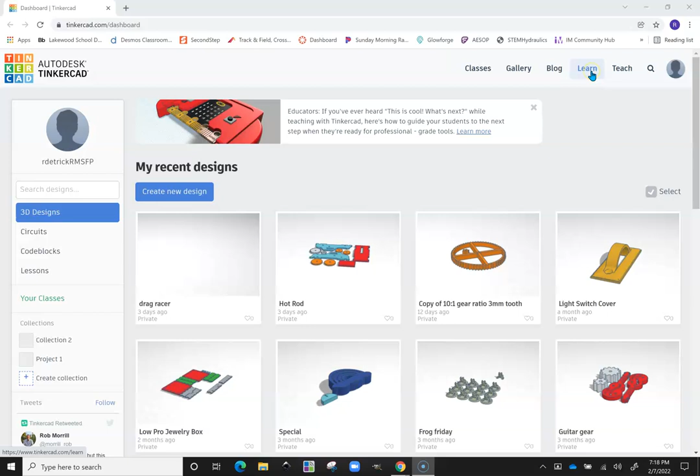Hey guys, in this video I'm going to go over the steps to correctly do the skull button. It's part of our lessons, so I'm going to click on Learn, Lessons, See All Lessons, and scroll down till I find it. There it is. I'm going to have to restart my progress, but you won't.

Okay, so here we go. I'm going to click on Start, and it will tell you step by step what you need to do. So if you wanted to, you can just follow along and do the steps, read them and do the steps, or you can follow along with me.

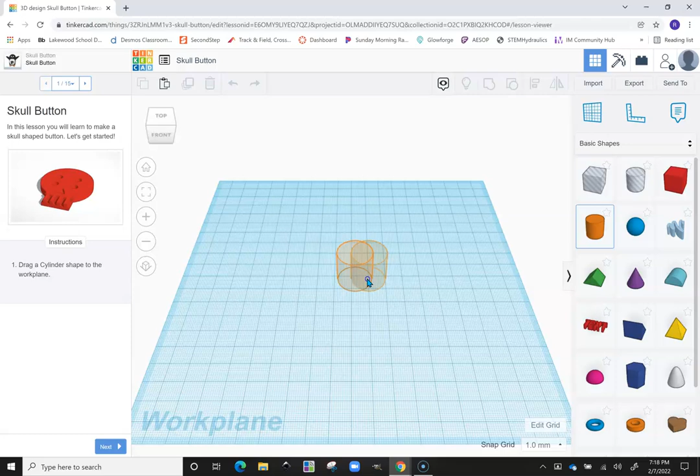Drag a cylinder shape onto the work plane. Okay, that looks pretty good. I can zoom in and make sure it gets perfect. That looks good. I like to make all of my cylinders nice and smooth, so I'm going to increase the number of sides while I'm here. Made it nice and smooth.

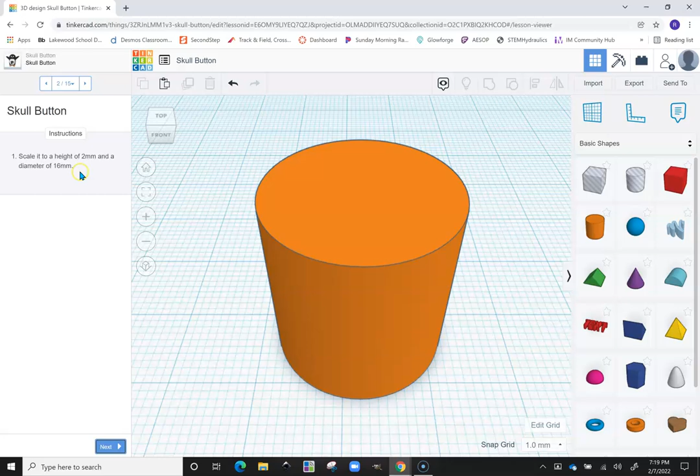Next, scale it to a height of 2 millimeters and a diameter of 16. I'm going to scroll out a little bit and click on the handle for the top. It needs to be 2 millimeters, and the diameter needs to be 16, so I need to change both of these to 16 and 16.

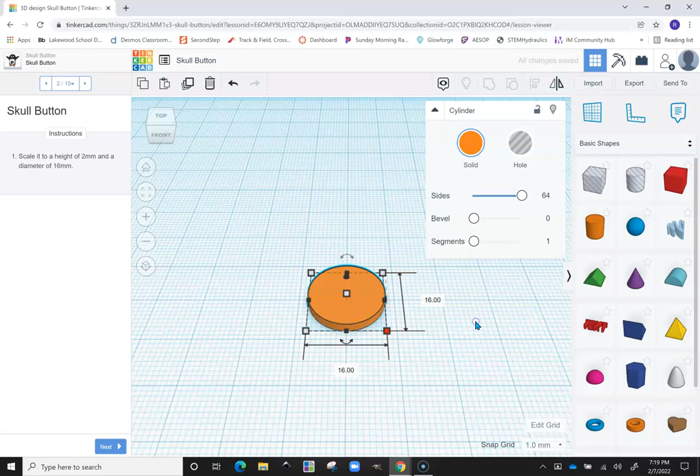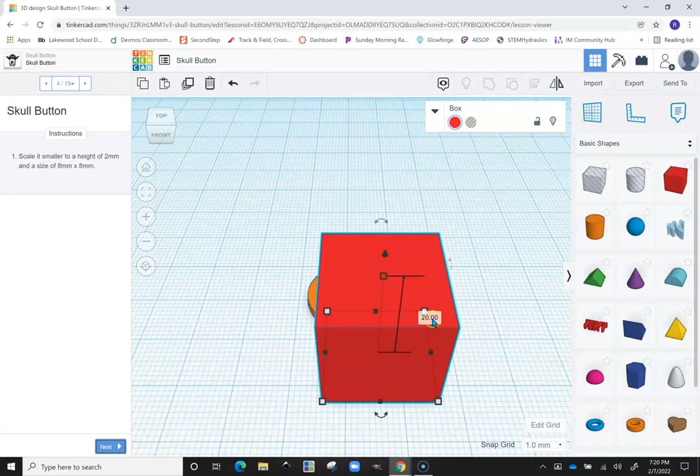Next, drag a box to the work plane. There's the box. Next, scale it smaller to a height of 2 millimeters and a size of 8 millimeters by 8 millimeters. So a height of 2 and a size of 8 by 8. I already put it in line where I think it needs to be.

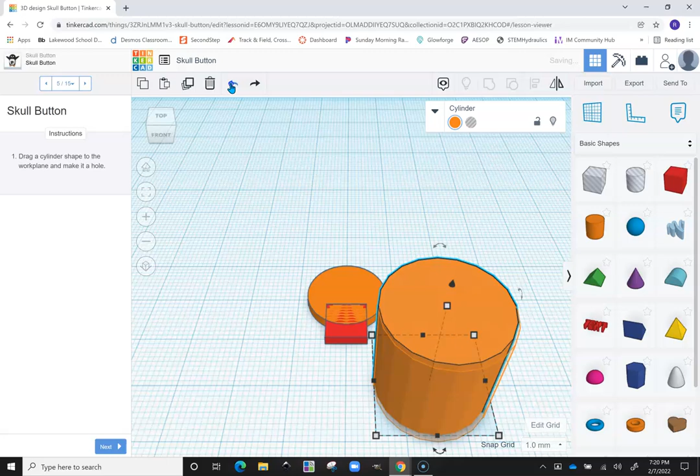Click Next. Drag a cylinder shape to the work plane and make it a hole. I can drag a cylinder shape and change it to be a hole, or what I can do is just grab the cylinder that already is a hole. Again, I like to make mine nice and smooth, so I increase the number of sides.

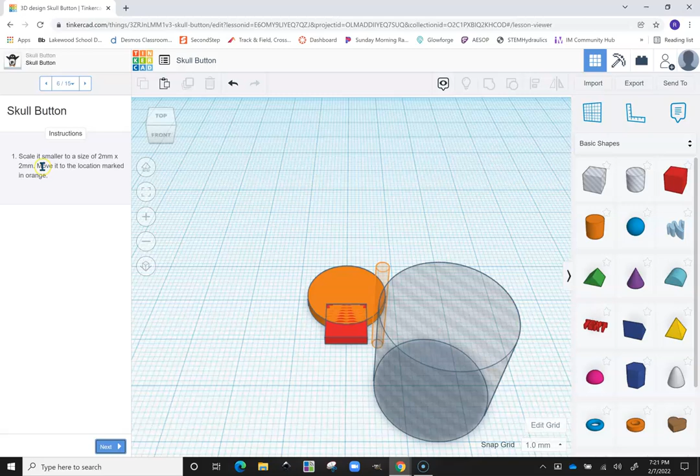Next, scale it smaller to a size of 2 millimeters by 2 millimeters, and then move it to the marked location. 2, keeps it nice and round, and I think it already is in the marked location. I'm going to click on this. Yep, it is.

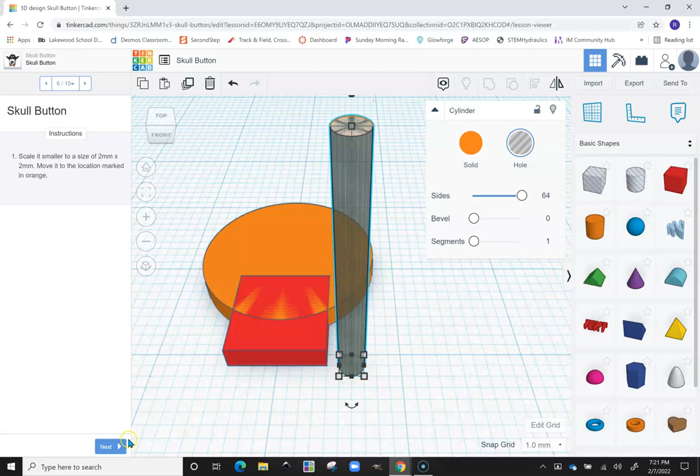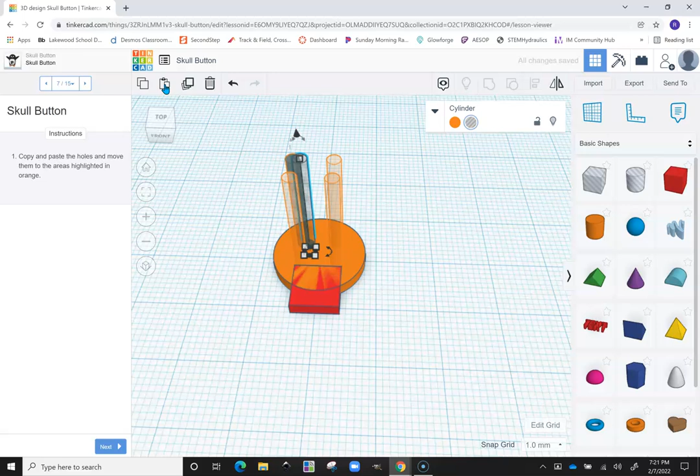Next, copy and paste the holes and move them to the areas highlighted in orange. So I'm going to tip it down a little bit. There's the first one. Copy, paste, using my arrow keys now. Paste, down and over. Paste, over, and I think that looks good.

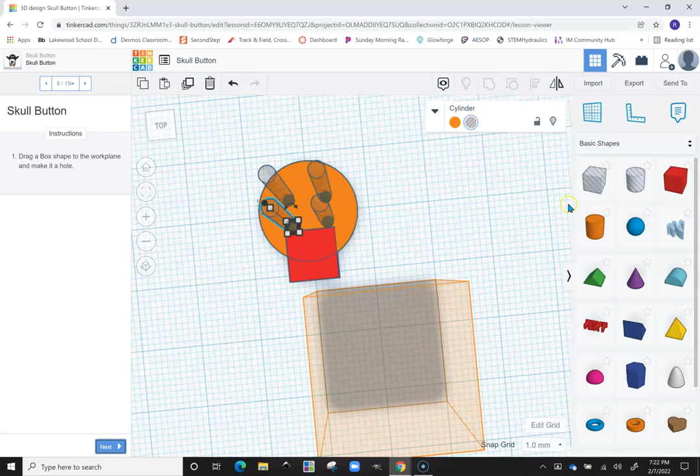Drag a box shape to the work plane and make it a hole. I could drag a box, but I'm just going to grab the box that already is a hole. Next.

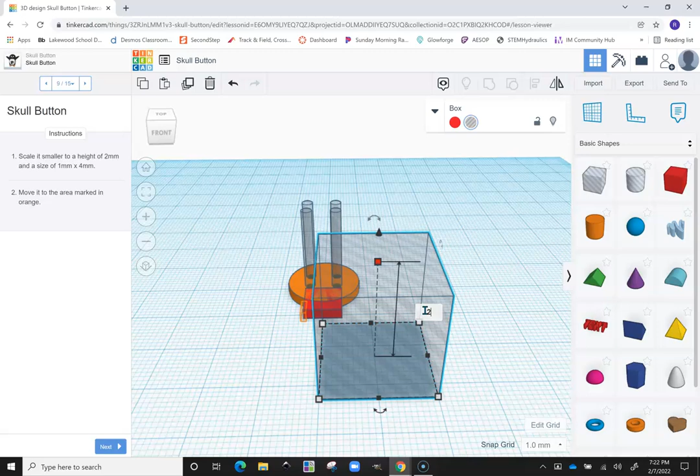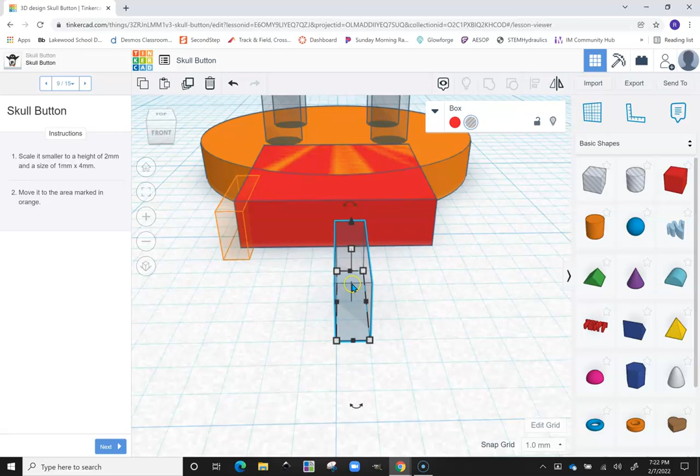Scale it smaller to a height of 2 millimeters and a size of 1 by 4. So to a height of 2 millimeters, and I know where it's going to go is right here. So this is the one that needs to be a 1, and the length is going to be a 4. You can zoom in because it says move it to the area marked in orange. Use my arrow, but what I notice is that if I use my arrows, it keeps on jumping over that.

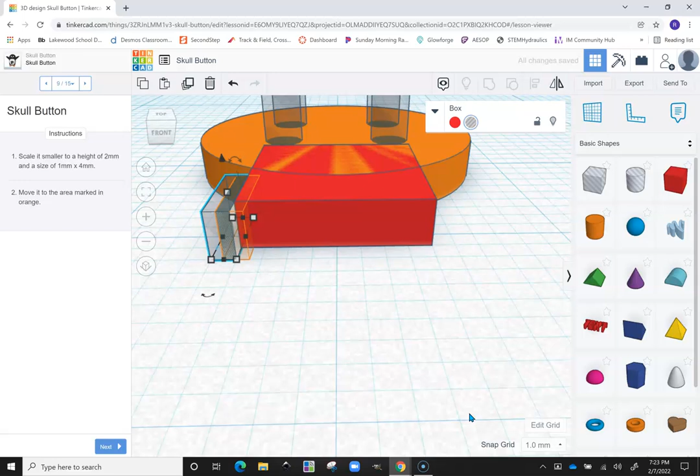So I'm going to teach you a new thing here, called Snap Grid. The Snap Grid is down here in the bottom right, and right now it's saying 1.0 millimeters, meaning every time I press the arrow key, it's going to move it 1 millimeter. Well, it's too far, so I'm going to reduce it. Now you can see it moves it to a smaller amount.

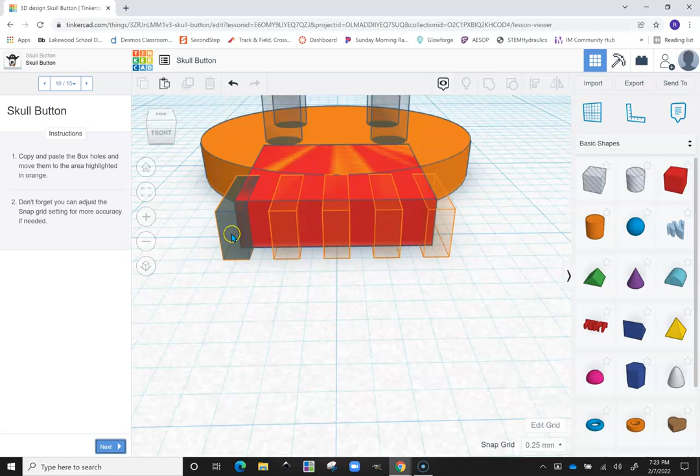Next, copy and paste the box holes and move them to the area highlighted in orange. Don't forget, you can adjust the snap grid as needed for more accuracy. So what I'm going to do is, I have that highlighted, copy, paste, move that over, paste, move it over, paste, paste.

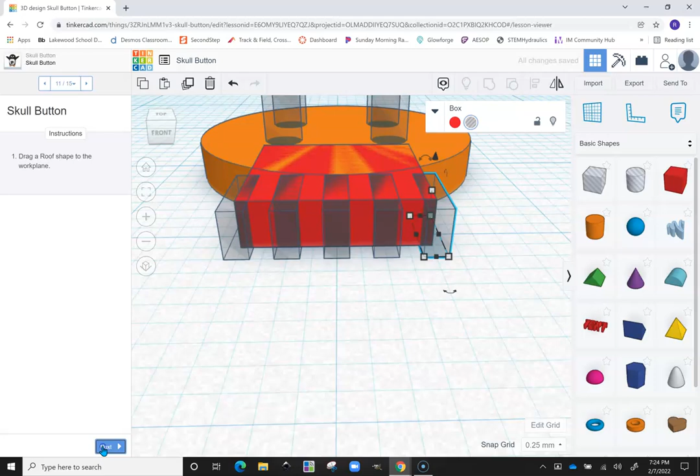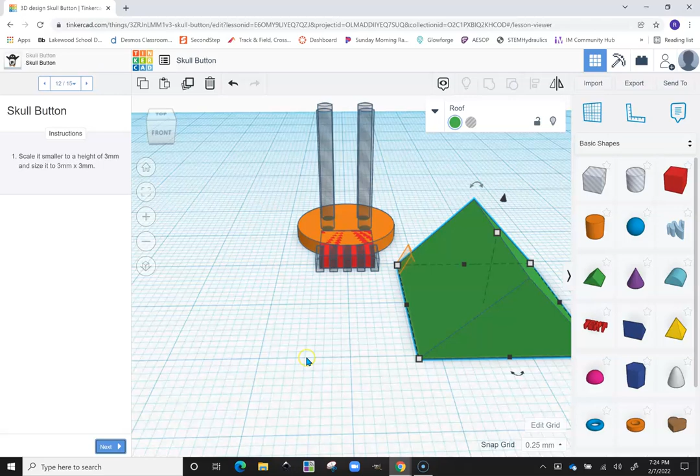Next, drag a roof shape to the work plane. Okay, roof, there we go. Next, scale it to a height of 3 millimeters and to a size of 3 millimeters by 3 millimeters. So everything needs to be 3, 3, 3, 3.

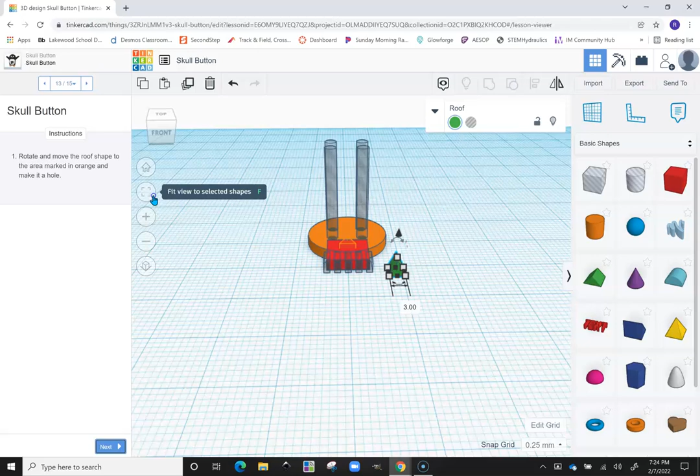Next, rotate and move the roof shape to the area marked in orange and make it a hole. I already have it highlighted here, so I'm going to zoom in. Okay, it needs to be rotated. So 90 degrees, hopefully that's... nope, it didn't rotate it the right way. That's okay, I'll do one more rotation. 180. There we go.

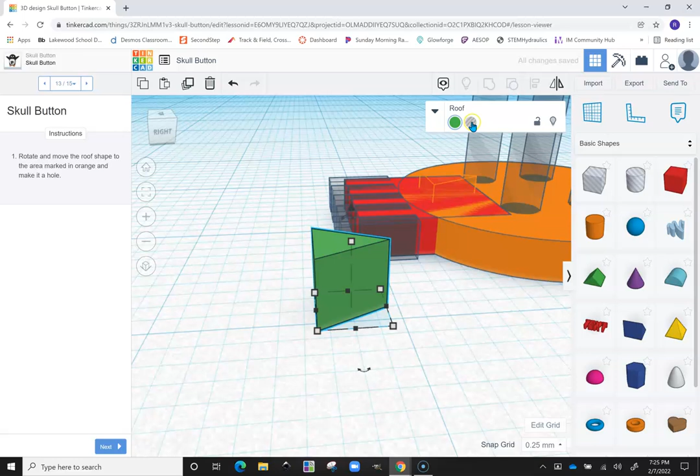Make it a hole and drag it to the spot where it needs to be. Let me zoom in there. Now I can use my arrow keys to get it. There we go, good. Okay, I just clicked my home button and it took me all the way back here.

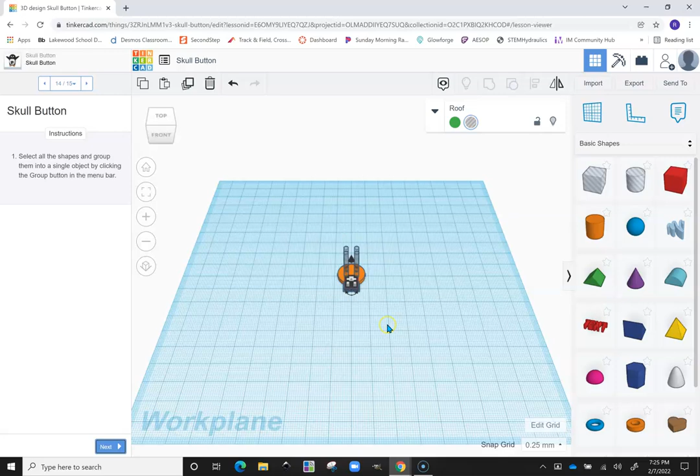Next, select all the shapes and group them into a single object by clicking the group button in the menu bar. Okay, before we do this, we got one more thing I want to take care of. If I was to group this all as is, these teeth get cut all the way through. All right, time out, we're not going to do that. I'm going to undo this.

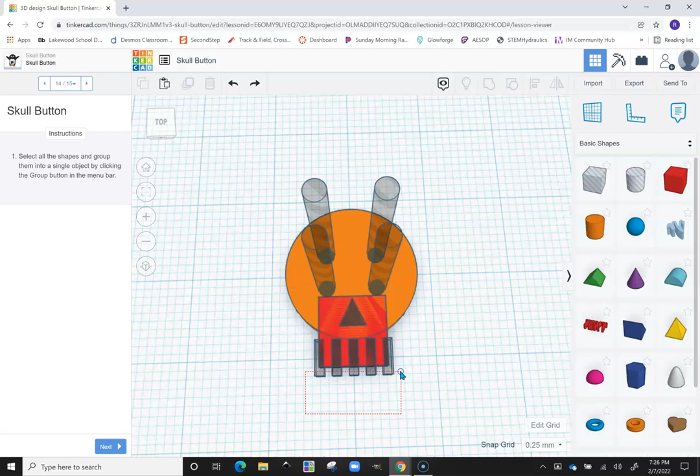What I'm going to do is select just these teeth, rotate that, and move them up just a little tiny bit. Now I can drag it and group them all. There we go. See the difference that I made? It didn't cut them all the way through.

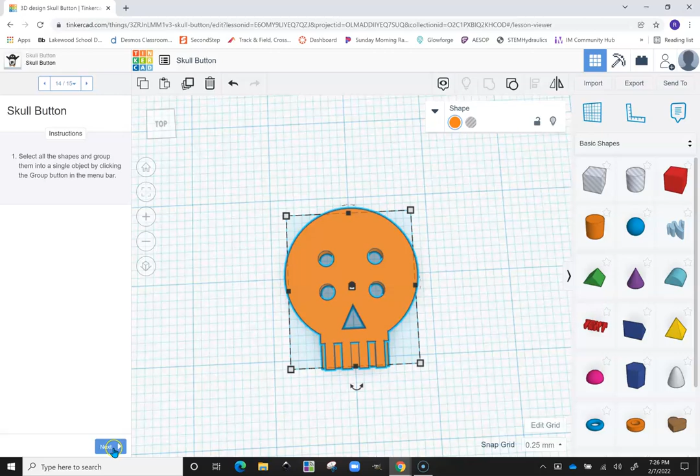Next, woohoo, it says we're done. So here's one thing though, guys, we need to change the color. That was the one thing that I had said. So I'm going to change mine to blue-ish. Okay, there we go. So now all you have to do is take a screenshot of it and post it to the assignment.